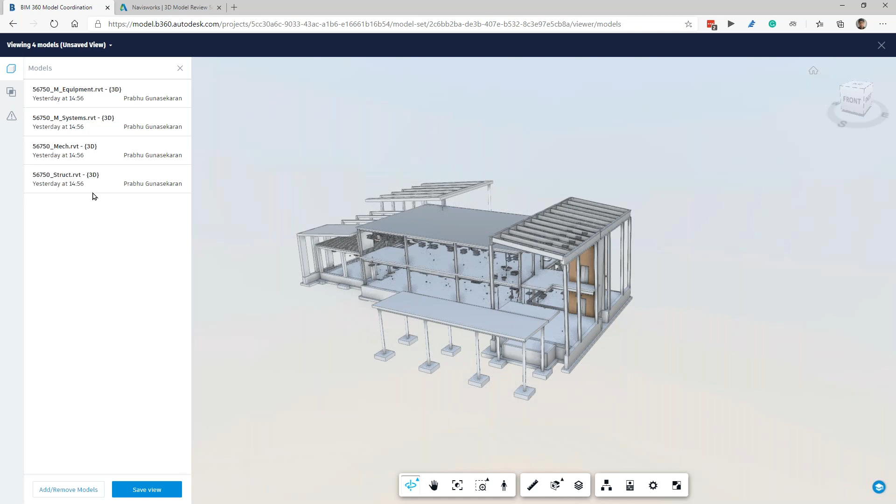And say, for example, I want to save this view, I can also do that, so that I don't have to create this every time. I don't want to come to model coordination and select the models every time to get the federated model. I can just click on save view, give a name. This is structure versus MEP.

I can make this view private or published. When private, it will be visible only to me. If I want the entire team to see this particular view, I can make it published. So now I'll make it private and call it 'model clash check for Structure versus MEP' and click save view.

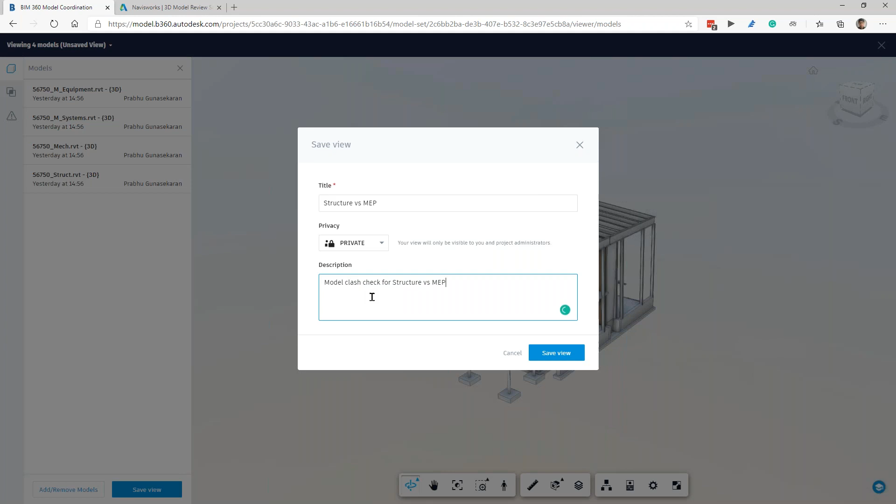So I've saved a view here now. I'll go back and show you where the view is located.

You see the top three tabs here. The first is the model window we just saw. The second tab is clashes, which we'll go to next. And if you go to views, you'll see all the views that are created.

If you have a private view, only you will be able to see that particular view. And if you have other views that are published, you will be able to see those as well.

Even here, you can select which coordination space you want. In all three tabs, you can select the coordination space that you want.

This doesn't have to be done only between different teams, like architecture and structural. There might be a situation where multiple people are working on an architectural model, like architect 1, architect 2, and architect 3. You can create a space for yourself within your working folder so that your architects can run a clash detection among their portion of work and make sure it is clash free and error free.

So it doesn't mean you'll have to create it between teams only. You can create it among your own team as well, like between architects, or between structural engineers and others. This is about the different views you can create.

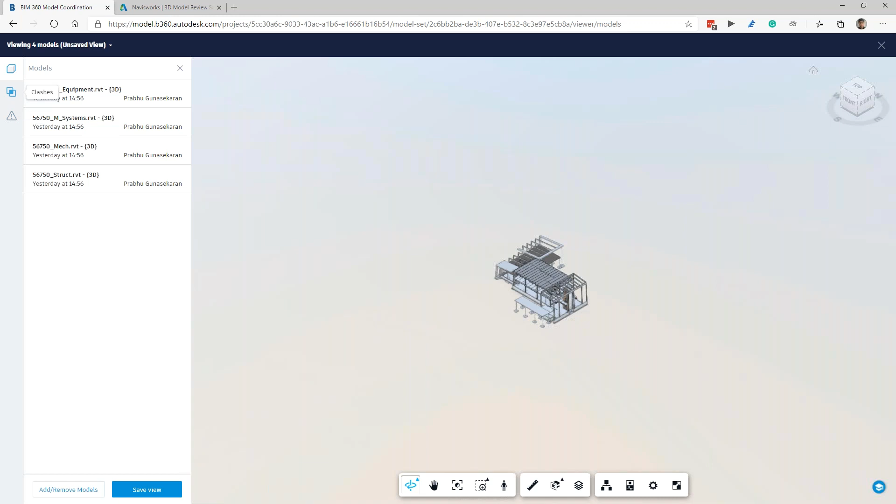If you go back to models, I'll go back to this view here. So I've opened up all the models, and you see the tab - this is the model viewer available in BIM 360, and you have all the properties available at the bottom.

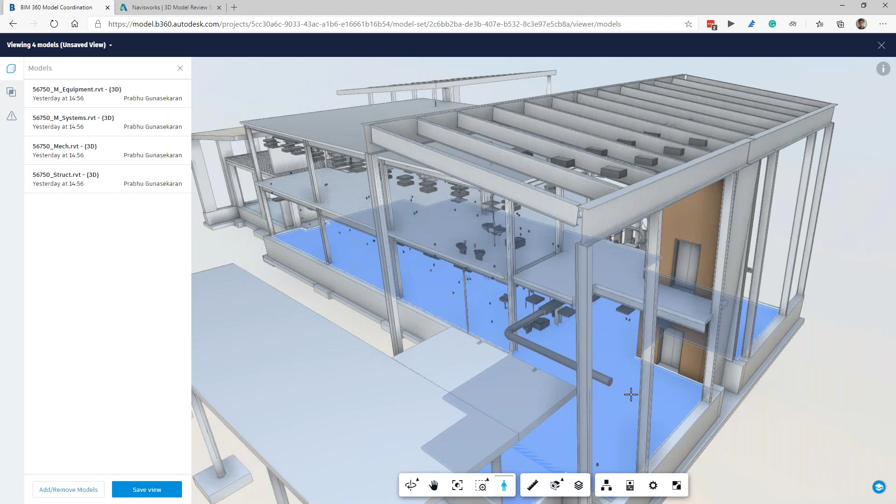You can orbit it, pan around the model, make it fit to view, zoom window, and even go into a first person view by double clicking on the model, and you'll be able to walk through your model just as you do in Navisworks or any other 3D viewing software. You'll be able to see your entire model from here.

You also have the option to measure your model. It automatically snaps to the edges, so I can see the height of different elements, the X, Y, Z dimensions, and the total absolute length. I can also measure angles and calibrate - so if I have a 2D drawing and want to calibrate this measurement, I can do that too.

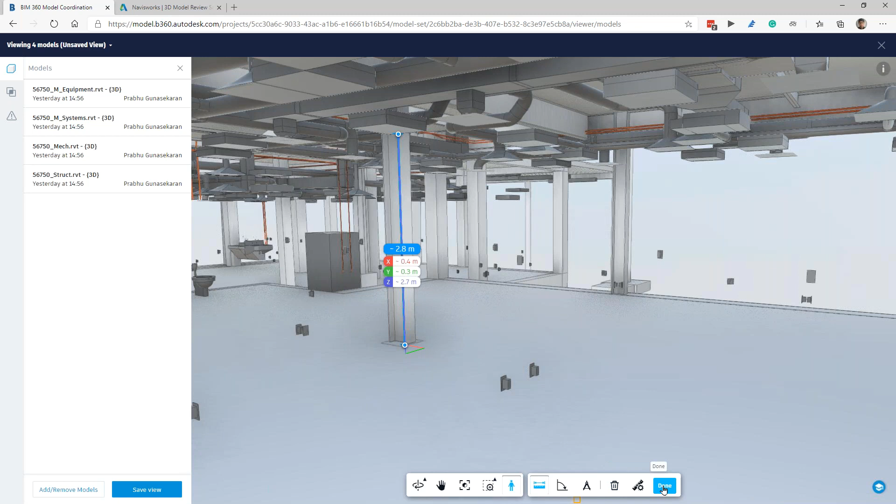You have the model, we have the levels here, and we also have the sections analysis. So if I zoom out of this window, and if I want to do a sections analysis, I can do that.

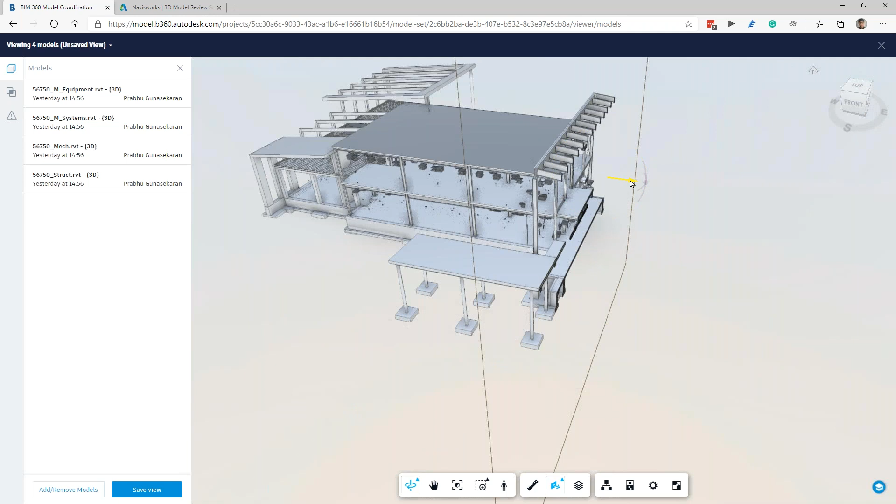I can add a section plane and just cut the model into whichever view I want to see. I can add different section planes that are available here, and I can also look at the different levels available in the model from Revit.

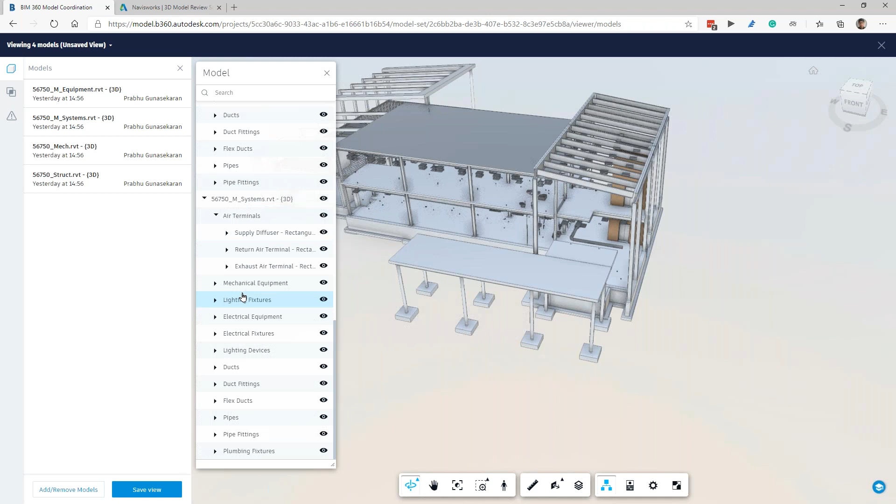I also get a model browser - this is exactly what you have when you work in Revit, where you get all the different model elements that are there. You can switch them off, make them visible again, and all that. This is copied from your Revit model as you upload it from Revit to BIM 360.

Similarly, we have different properties to change the views of the model specific to BIM 360, where you can change the interface here, and you can also move to full screen. So this is about the model window.

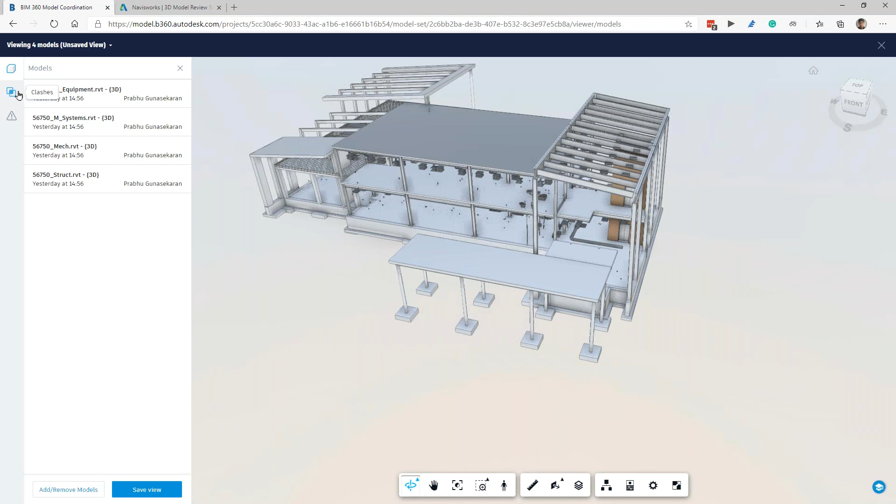If you see on the left side of your screen, you can see clashes. If I click on clashes, I have 4 different models here, and it's going to show me all the clashes between all of these models together. So if I'm a structural engineer, I can just select structural so I can see what is all clashing with the structural model.

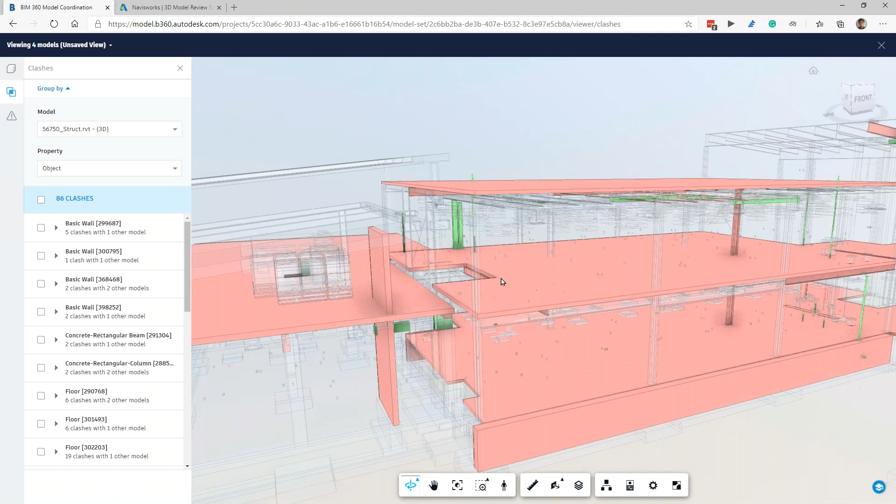So I see all these slabs are having a clash. I can choose different departments as well to see the clashes that they have. And I can also change the clashes by object property, object system name, or type name.

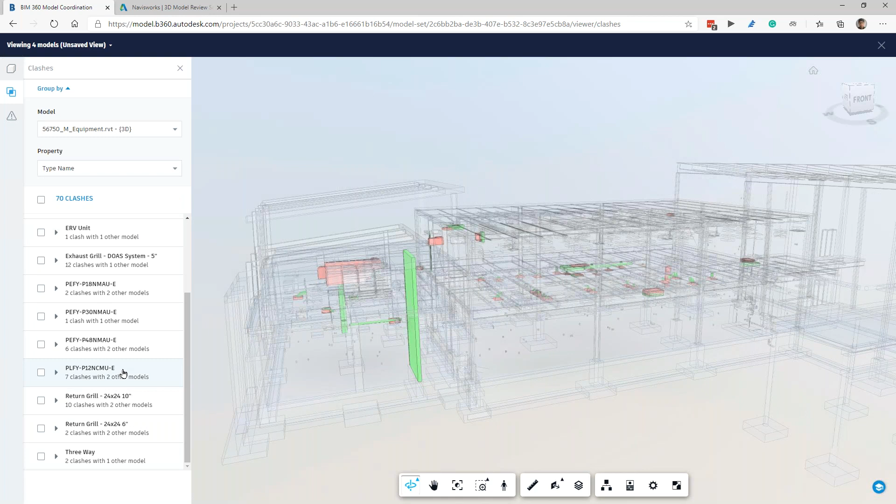If you click on object, you see there are 70 clashes based on object names. If I click on system name, it gets the system name and tells me that DOAS first floor has 12 clashes with the other model. Similarly, the primary refrigerant HRU1, this is a system, it has 9 clashes with another model. And similarly, I can also go to type name, where it will give me the different clashes based on the type name. So for example, you see 24 inch by 24 inch base 8-inch neck is having one clash, and there's a clash with the lamp based on its type name.

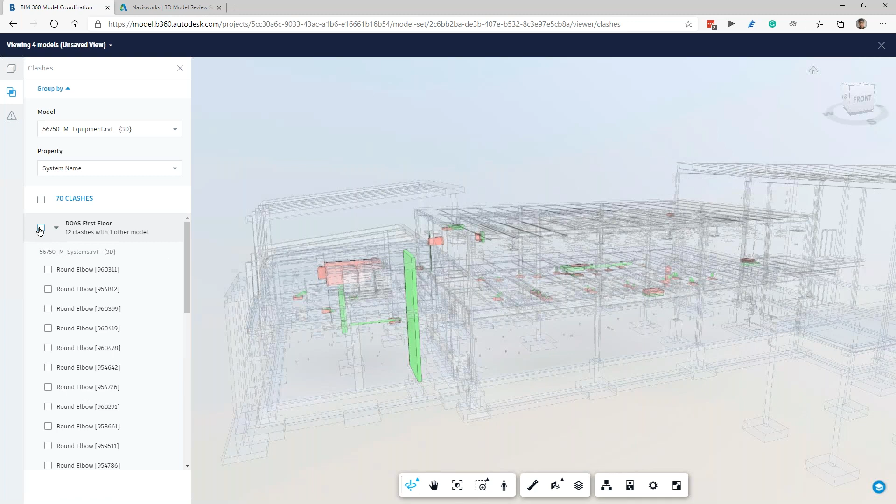So if I go back to object, and I'll go back to system, I'll see what is this particular clash. If I drop down, I can see all the different clashes that are happening here. And if I click on this, I can see all the clashes that are here. I can zoom in, I can see all the different clashes. Similarly, if I have a different type, here also I can see the different clashes that are available.

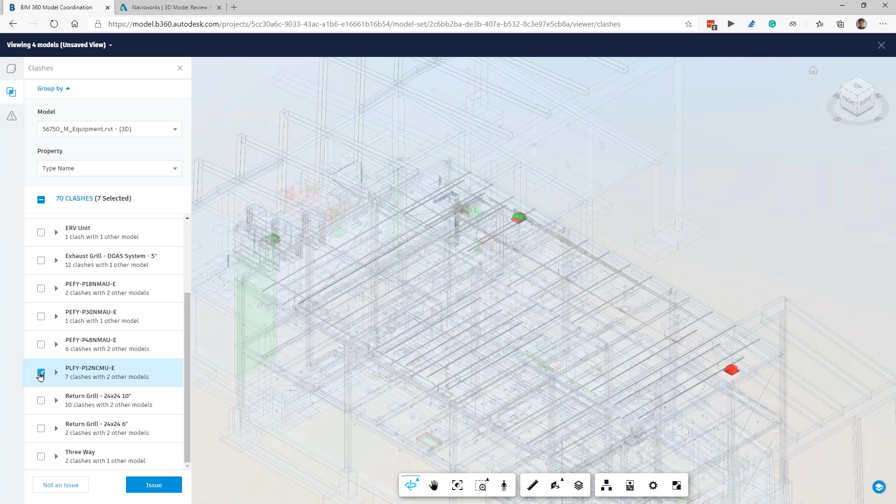Go to three-way, see there's a wall that is clashing with the equipment. The ERV unit, there's a clash with another equipment here. So I can see all these clashes, and once we've identified these clashes, what can we do with these clashes?

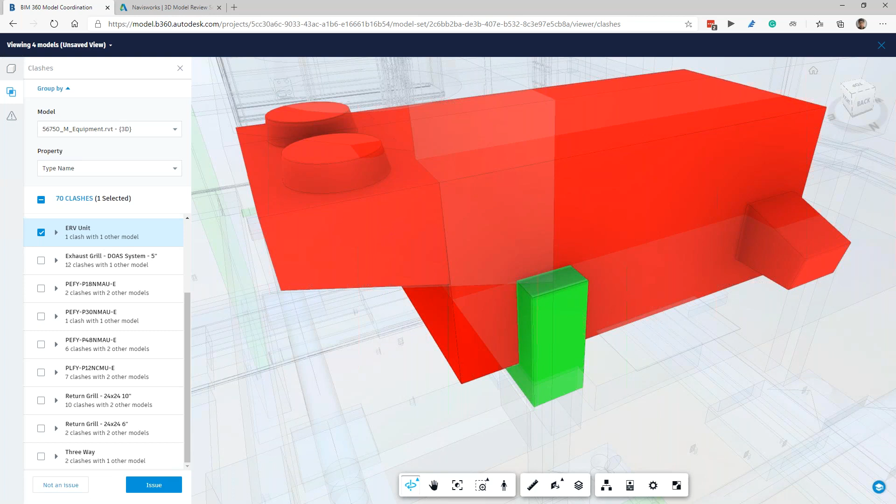I'll tell you in just a minute, but before that, I'll close this and I'll show you about the other tab that we missed here, which is called clashes. So remember how I told you, you want to prioritize your clashes, or see where there are more critical clashes or more number of clashes to get a visual appeal of which model is clashing with what.

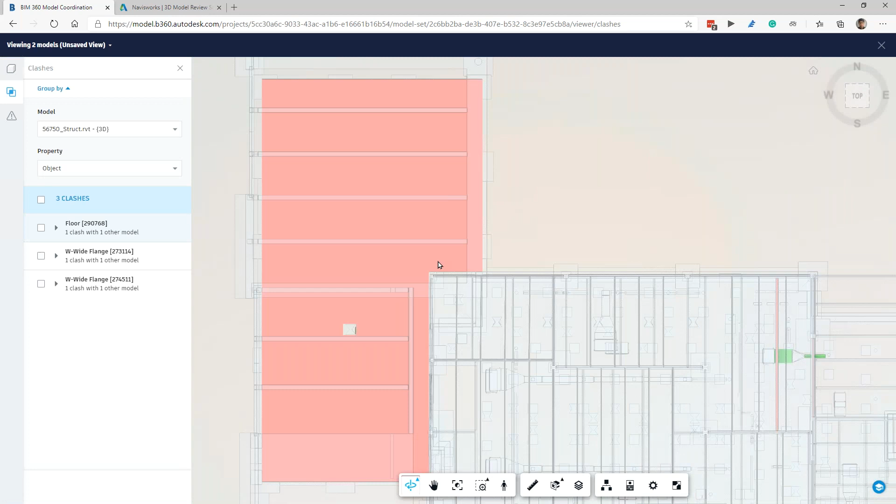So this is exactly the same window that we saw earlier, but this time it has just taken the clashes for the 2 models that I have selected. And I can see that there are 3 clashes. I can still change it to object or system name or type name.

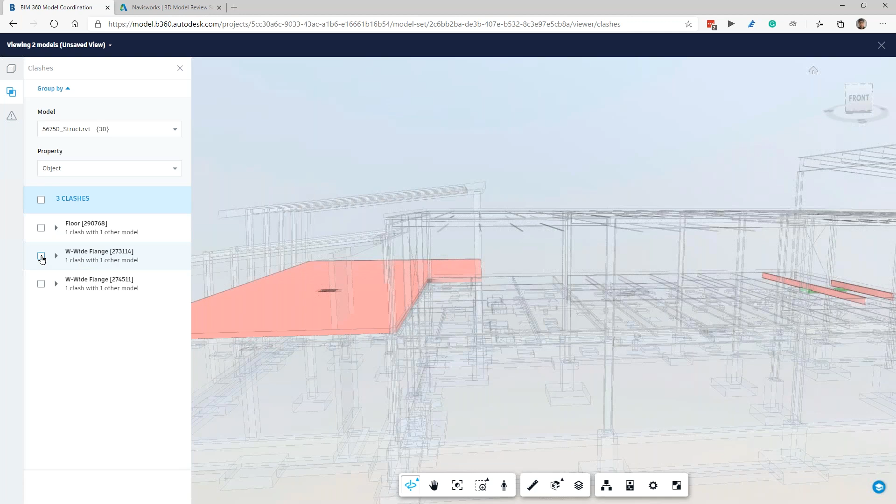So if I click on this, I see there's a wide flange clash. So if I click on this, I see there's a pipe that is clashing with my W section beam. So what do I do from here? I found a clash. So how do I resolve this? Or how do I make sure that this gets resolved?

So once I get a clash, I click on it. You see at the bottom, there are 2 options. One is not an issue. The second one is issue.

Not an issue means that there might be some valid penetrations in your model that are allowed or that can be adjusted at site. So those are not really clashes, but something that has to be adjusted at site. We can select those types of clashes and click on not an issue, so that this particular clash will be removed from the model coordination window.

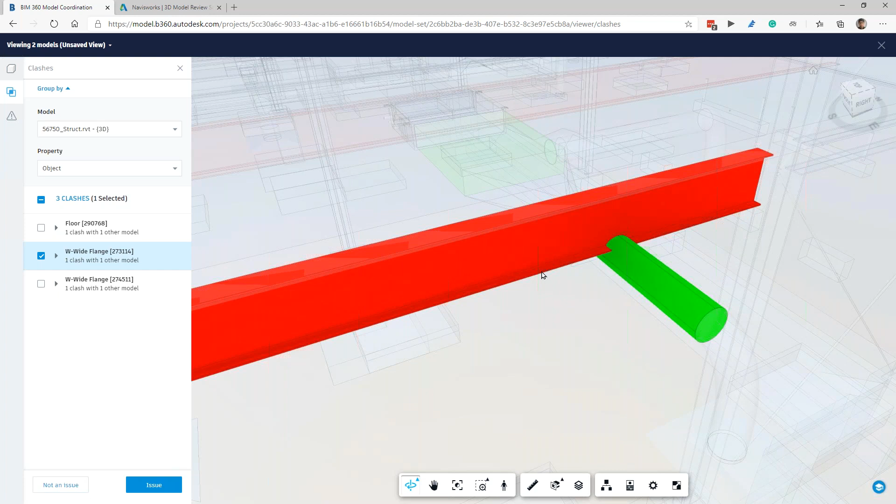But if you think that this is not a valid penetration, that it has to be resolved, this pipe has to be lowered, or this beam's elevation has to be changed, you have to create an issue. So how do we create an issue? Just click on issue.

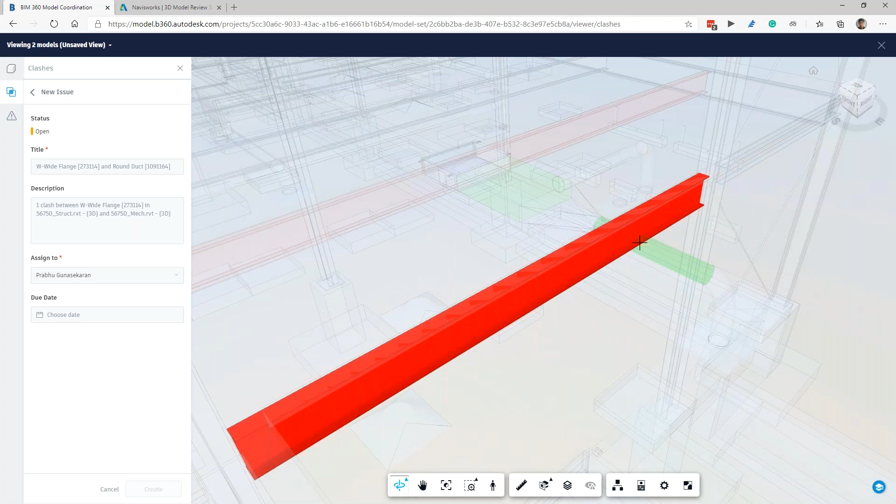And click, we'll have to create a pin in the BIM 360 window. So I'll just click at this particular location to create a pin here.

Once I've created a pin, I can come to the left side. I can see that BIM 360 has already taken the object names directly from the models. It says W wide flange, the object number is this, is clashing with the round duct, the number is this. So I don't have to manually search this and put this information here—it will be automatically put up in the title. Similarly in description, it will also tell you the number of clashes between these two different objects.

And what I can do is assign this to someone in my project. For example, if I want, let's say I give my name here. If I want to assign this to someone, I can give their name, choose from the list that is available, and then also give them a date. So if this looks like a critical issue, I want it resolved by tomorrow—I can give them a due date here, and click on create.

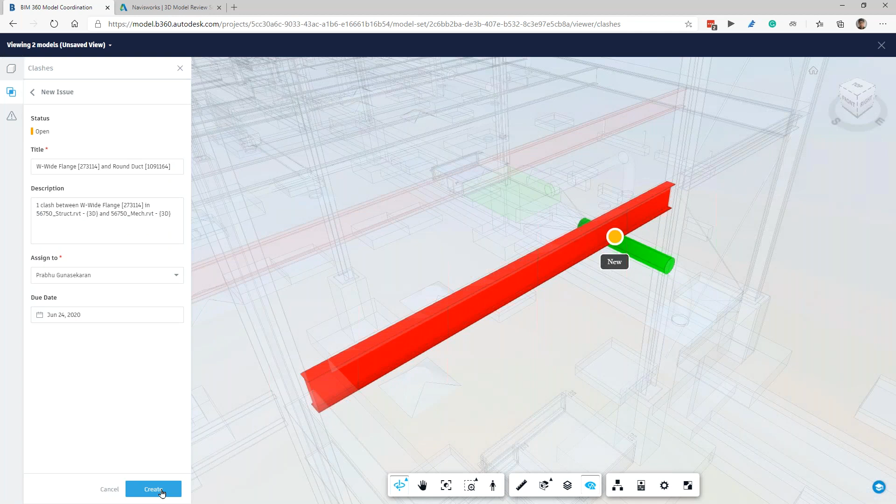So what this has done is now that particular issue is removed from the clash dialog box. Let's see where it has gone. On the bottom, you have another tab called issues. If I click on that, you will see all the active issues that were created from the clashes.

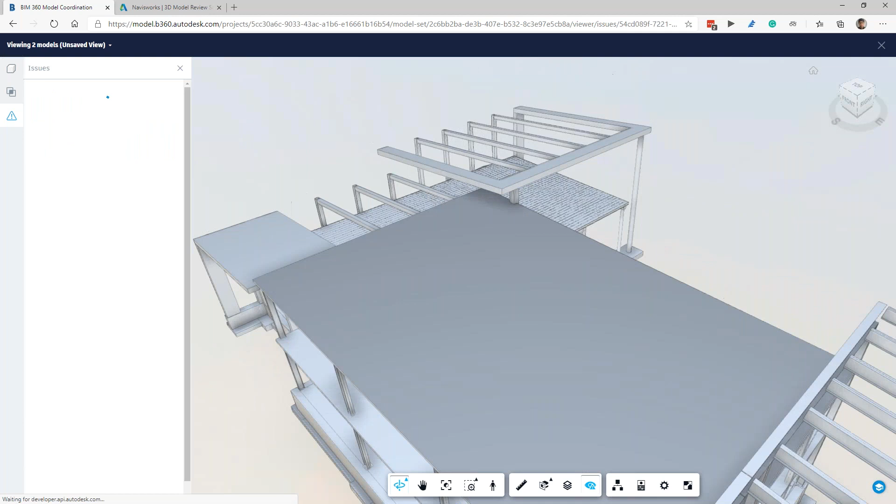If I just click on this particular issue, it is going to take me to that beam and duct that we just saw, and it is going to give me all the details here: the type of clash, who it's assigned to, what's the due date, the link document which is this particular model, who's the owner, and if you want to specify the root cause of this particular clash, you can say that as well.

The moment you assign it to someone, that individual is going to get an email stating that an issue has been assigned to them, and they'll be brought back to this window where they can give a response and either answer this issue or update the model and close it, or if it is not a valid issue, they can mark it as void.

It cannot be made void by every individual. Only the project admin or the BIM manager will be able to close these issues. The person you have assigned the issue to will only be able to answer to it, and based on that answer and the update of the model, the BIM manager or project admin can review the model once and close the issue.

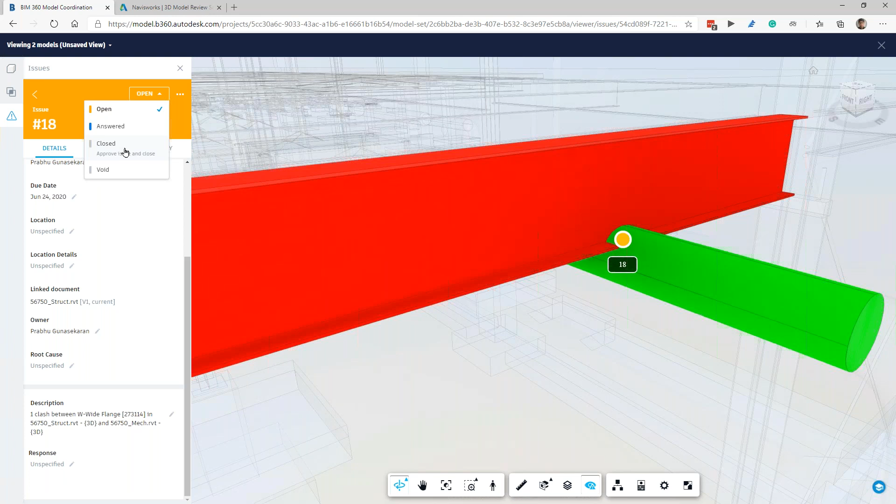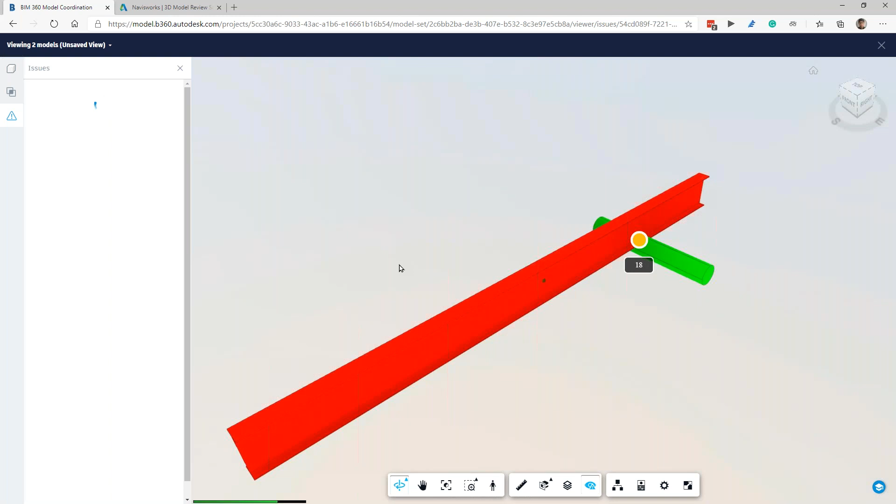So what else can you do here? If I close this again, you see these are the active clashes available in the model right now. Similarly, we have assigned—under assigned, you will still see all the clashes that were identified by us, and clicking on that will take you into the same window again, highlighting the clashes. So you can close that.

And similarly, if you have issues that are closed, that will be available here. So for example, let's say I want to close this issue, and once I've updated the model in this BIM 360 environment as well, I can say pipe move as a response, and once I review the model, I can say this is closed.

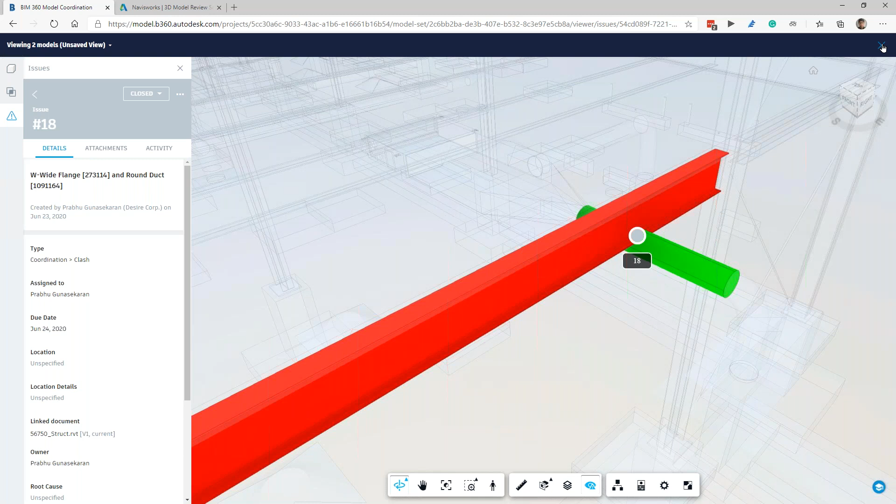So once the issue is closed, you can go back to closed and see this particular issue will be moved to the closed tab once it is closed. And similarly, under document management, we have a tab called issues that collects the issues from the overall project, and the issues that you create in this model coordination service will also get updated in this issues tab.

So if I go to document management and go to issues, I can see all the different issues that are available in the project, and you see there are some issues that are tagged as coordination issues. So these coordination and subtype clash, these are the issues that have been created by the model coordination service. So I can also filter out these particular issues here.

So if I say I want to see all the coordination issues, or all the clashes that I have in the model, see that the clashes that we created using the model coordination window will be available here, and you can see the status of those issues, whether it is overdue or who it is assigned to and all that. So this is about creating issues in model coordination.

And sometimes there is a case where, so let's say I'll go back to model coordination. Sometimes there's a case where you close an issue but find out that it has not been resolved or it needs more attention, where you want to bring that issue back or reactivate the issue. So you can do that as well. So if I go to assigned here and open this particular issue, so this is closed now.

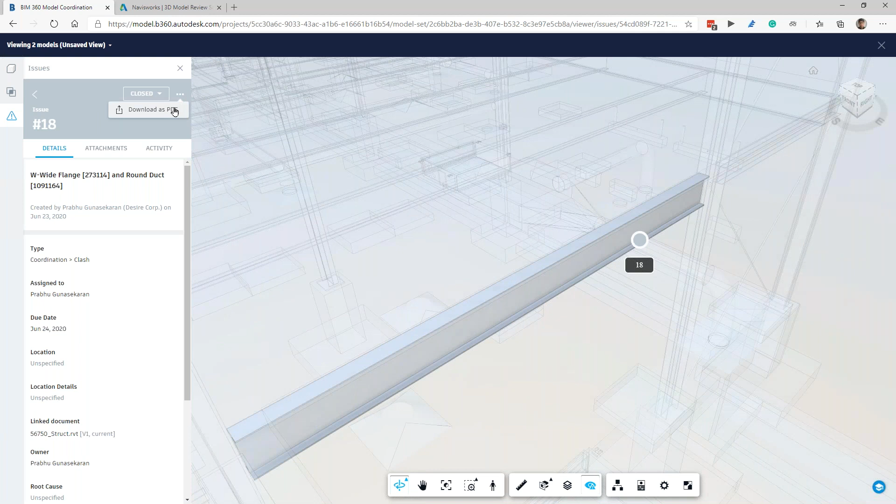Yeah, and I can also download a PDF of the report of all the issues that I've created in the model, so you'll get a list of all the issues with the screenshots like this, so that you can be aware of all the different issues in your model and whether they have been closed or not. You can close this.

So this is about assigning issues and exporting an issue report, and the issue report can also be exported from the document management part. So you go to issues, click on issues, and you can export a PDF report or a CSV report based on the filters that you have created here.

And we also saw that many people use Navisworks to run clash detection and all that. And BIM 360 is actually connected with Navisworks, and with the recent Navisworks 2021 version, the BIM 360 coordination is there in beta, which allows you to track all the issues that are happening in BIM 360 into Navisworks as well. So this is how you create an issue in BIM 360, which I showed you here.

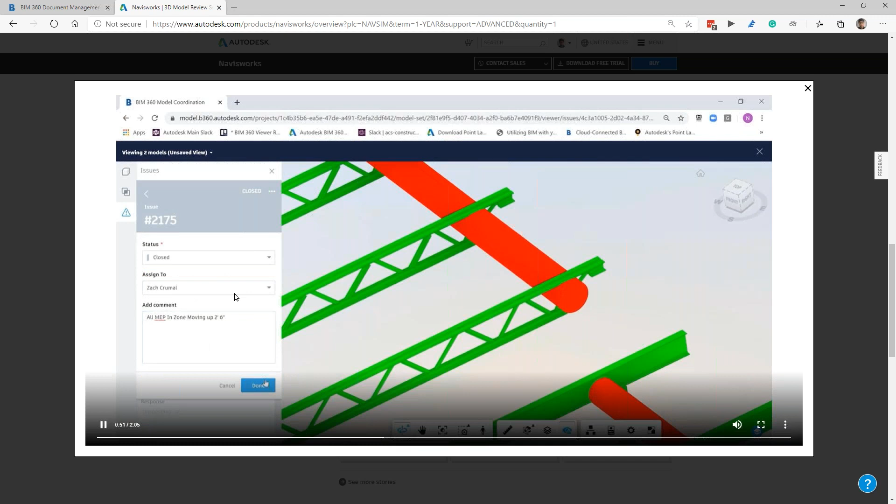Similar to that, if you open Navisworks Manage 2021, we have a new tab called BIM 360 coordination. You can select the coordination space, select your particular project, and select the project that you want. And all the models that are there in the coordination space will be visible within the Navisworks window. And all the views that we have created will also be available within Navisworks. You can open them up within the Navisworks desktop tool.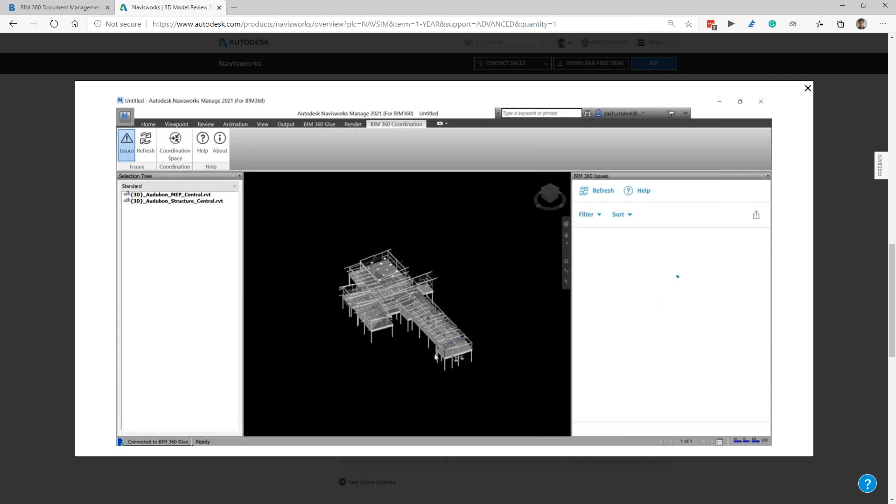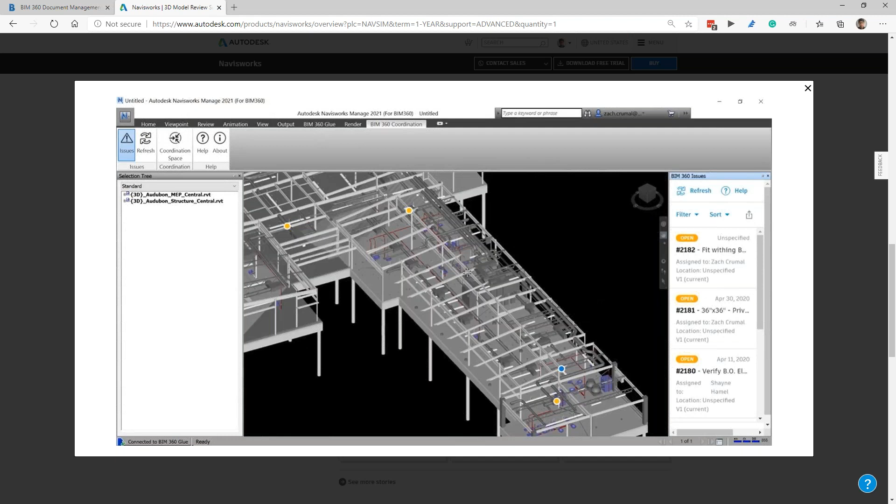And once we've opened that, on the right, you can see that all the issues that we have created in BIM 360 will also be visible here, with the screenshots and all that, and you can either close those issues or create new issues directly within the Navisworks window. This is right now in beta, which is coming soon to Navisworks 2021. And you can save the model with all the issues directly on your desktop. So this is about resolving clashes with model coordination.